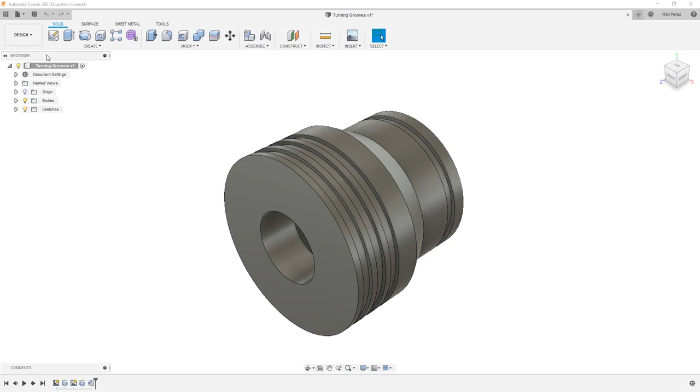To get started, we want to upload the supplied file, Turning Grooves. We want to navigate to the manufacture workspace and create a new setup for mill turn.

We're going to make sure that the stock size is appropriate and that the coordinate system location is good. Notice that these parameters are all metric. This is because our file is currently set to the units metric. I'm going to cancel this and modify the document settings to make sure that we're using an inch type.

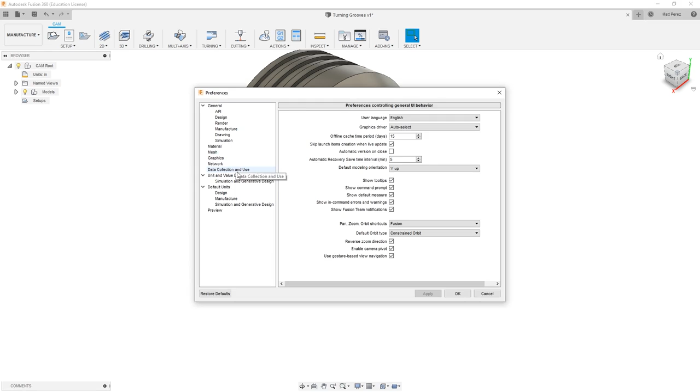When you go into your user preferences, there are default units for the design as well as default units for manufacture. So even if you reset your default units for your design workspace, you want to make sure that you reset your default units for your manufacture workspace if you're consistently working in inch or metric files.

Once our units have been reset, we're going to go into our setup again, using a mill turn. Then we want to make sure that our stock is an appropriate size and that our coordinate system is in the right location. We are going to be basing this off the front of the stock, and then we're going to navigate to our stock setup.

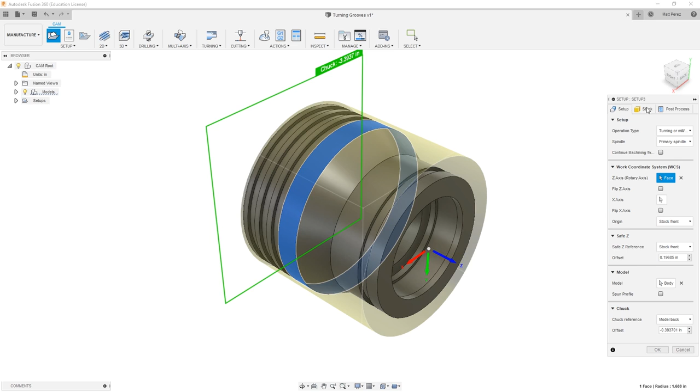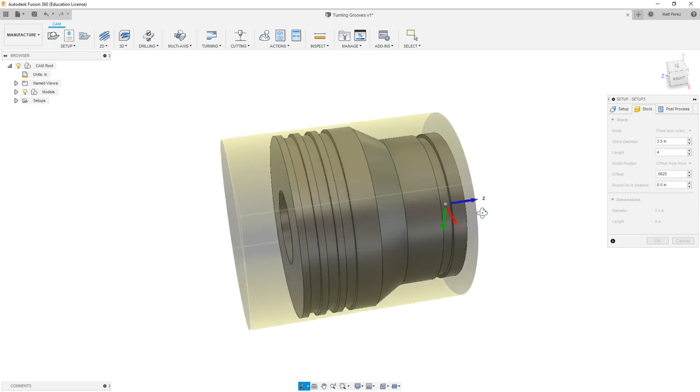We're going to be using a fixed size cylinder, 3.5 inch outside diameter, and we're going to make the length 4 inches, and offset it based on the front. I want to add a small amount to the front, just enough to face the part and get started, but we want to make sure that the majority of the offset is on the back, so that the chuck can actually hold the part.

We're going to go ahead and say OK. And now we've created our new setup and our stock.

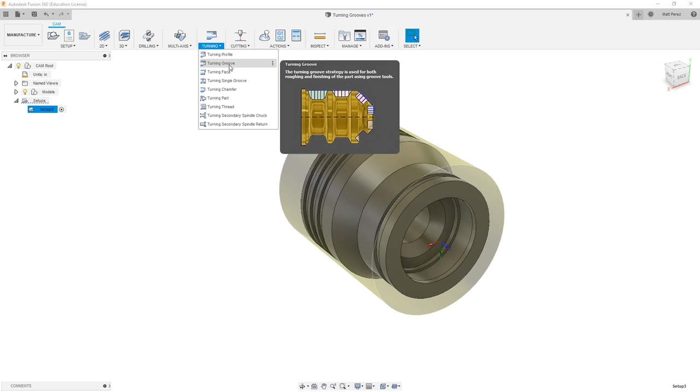In this lesson, we're going to be exploring the single groove toolpath in Fusion 360. From our turning dropdown, notice that we have turning single groove, and then we also have multiple grooves. We're going to be using the turning single groove and take a look at the options we have inside here. I do want to note the size of our grooves could differ depending on which geometry we're cutting.

Also note that my camera mode is set to perspective with ortho faces. You can change your display settings by going into Display Settings, Camera, and turning it to just an orthographic view if it helps a representation for you.

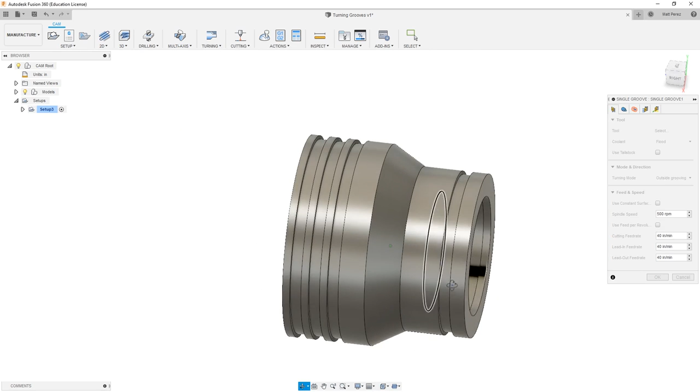We can also use Inspect Measure to get an idea of the size of some of our grooves, but note that does kick us out of the operation that we were creating. The distance between here is 0.188. So this way we have the information for when we're creating our single groove.

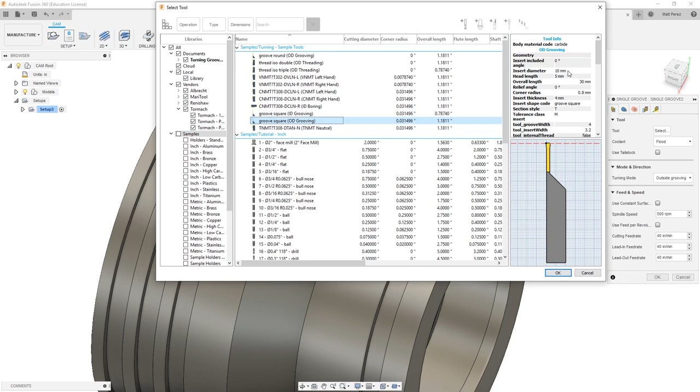We're going to take a look at the tools, going into our samples library, and we're going to be using a square grooving tool. We have one for the OD, and if we take a look at the information, you'll notice that it's a metric tool. We're going to say OK for now. We might need to create our own tool or modify its parameters. We're going to be using it for outside grooving.

And then we're going to go into our geometry section and note that we need to pick the groove positions. We can select the groove location and note that the alignment can be middle, back, or front. Each of these will have different implications based on your selection.

Back will offset the tool from the selected groove geometry in the negative Z direction toward the back side of the stock. Front will offset the tool from the selected groove geometry toward the front side of the stock in the positive Z direction.

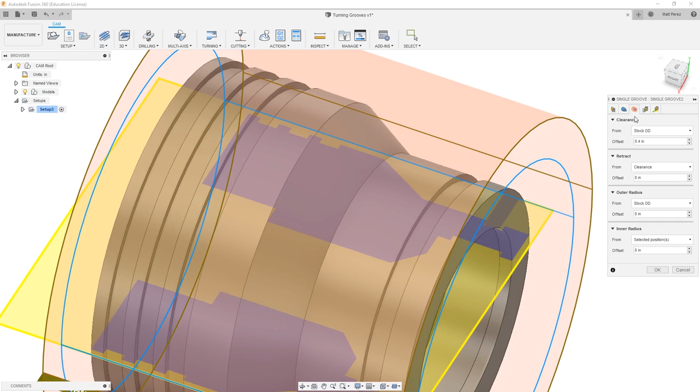We also have our radii values, which will control the outside and inside locations where the tool can go, as well as its clearance and retract planes.

And then in our passes section, we have some options. We can use pecking, we can dwell before the retract, and we can also allow rapid retract. If we want to use this as a roughing operation, we can also tell it a small amount of stock that we want to leave behind.

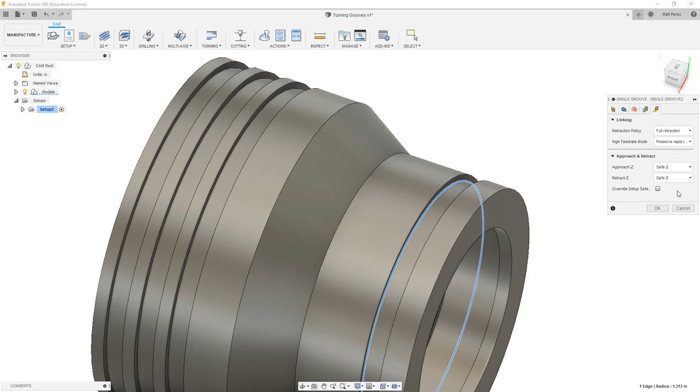And then we have linking parameters. Notice that there aren't as many linking parameters here as there are for something like a profile. So let's say OK and see what we've created.

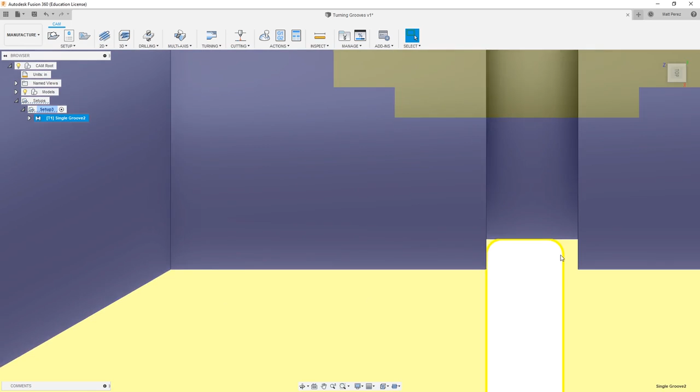As we take a look at this from our top view, we can see the yellow preview of the profile, and we can see exactly where we've cut. Because the tool isn't perfectly square, we aren't able to get into that square corner. And because the width of the tool is not matching the width of our groove, we aren't able to completely cut this groove with this operation.

The single groove tool will allow us to come in and create this cut, but again, there are some parameters that are going to be affected.

If we edit the tool itself, we can modify the parameters of the tool so that it does exactly match the groove. Now again, you would want to do this if you're working directly off of a purchase tool or if you're cutting your own tools.

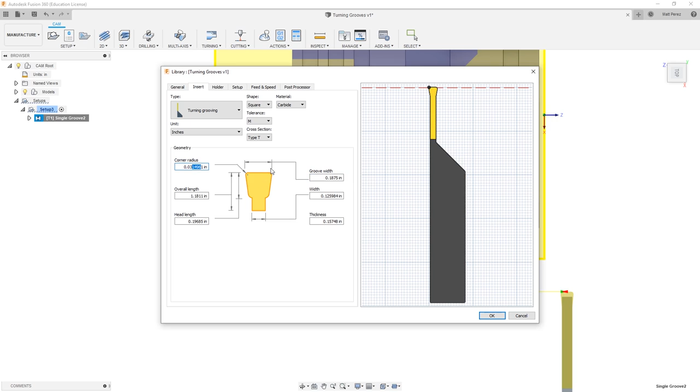We're going to set this to inch, and we're going to take a look at the groove width. Now remember, our groove is 188, which is actually going to be 1875 based on the rounding values in our inspect measure. We can modify the rest of the parameters if we want to reduce the corner radius, for example. And again, these values will come directly from a supplier tool.

I'm going to go ahead and say OK, adjusting those parameters, and I get a warning telling me that the operations using the tool need to be updated. So I'm going to override those and update the tool, and then I'll use Control-G to regenerate.

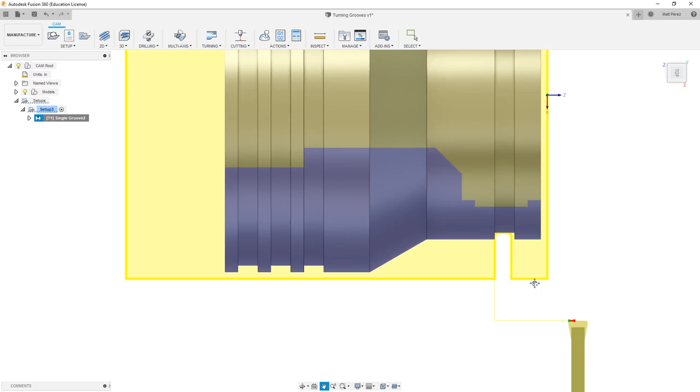Notice once it's regenerated that we do have a slight adjustment here. I'm going to simulate this toolpath, and I'm going to play through and take a look at it.

If we change the stock to transparent, we can now get a view of exactly what's being cut. The tool now exactly matches the width of our groove, but we still have a small radius to contend with.

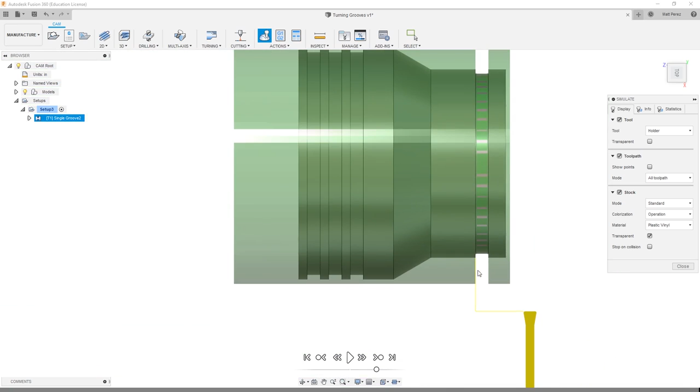If the actual geometry does need a square cut, it'll be a very specific tool that needs to be used. However, this gave us the cut that we needed based on the modifications we made to the tool and the toolpath itself.

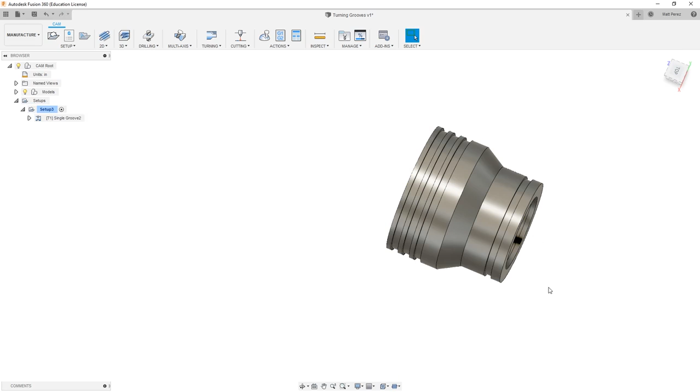Notice that we didn't do any profiling or roughing of this geometry first, and in reality that is going to be the first step, but what we want to focus on and explore is going to be grooving toolpaths. So for right now, let's navigate back to a home position, and let's save our file before we move on to the next step.